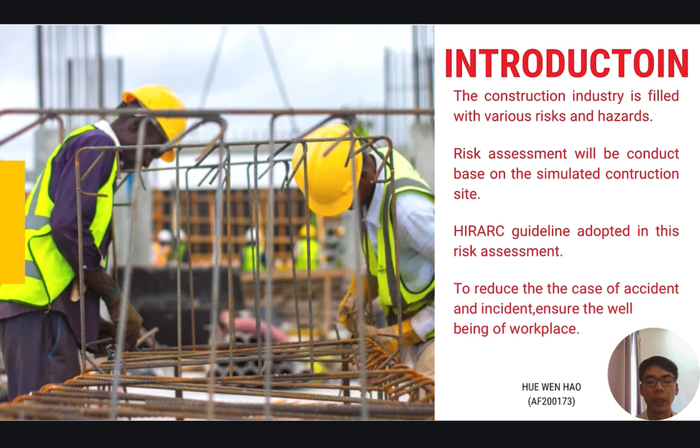Good day, doctor. My name is Chao On, matric number AF200166. I will talk about what construction site we chose and the overview of it. The construction site that we chose is Affin Bank and HSBC Bank, located at TRX Kuala Lumpur. This construction project is led by PERI Formwork Malaysia Sendirian Berhad.

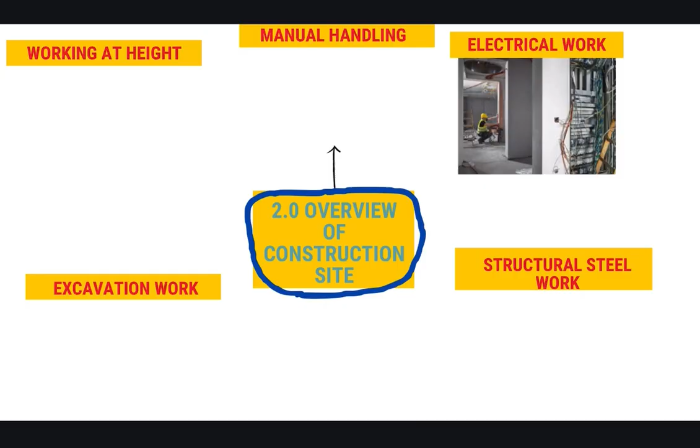Next, what are the types of work included in this construction site? First is working at height. Next is manual handling, electrical work, excavation work, and the last is structural work, steel work.

The meaning of working at height is a task conducted in a place where a person might fall a significant distance and sustain physical injury or even fatal injury. For example, building maintenance, installation or repair of structure, painting, window cleaning, electrical work, scaffolding, or roofing are examples of working at height.

For electrical work in the construction industry, it involves wiring installation, power distribution, fixture and appliance installation, and many more. This type of work needs an experienced electrician or electrical engineer to conduct it.

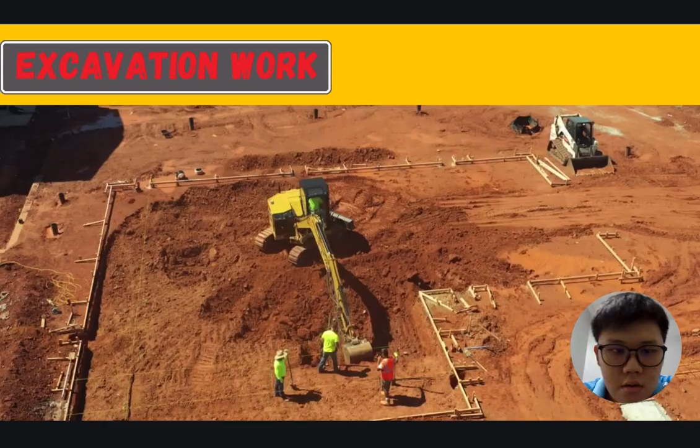The meaning of excavation work is using heavy machinery like excavators, bulldozers, cranes, or concrete mixers to do excavation of soil, rock, or other materials as part of a building or demolition task, using tools to open, face hollows, or even holes.

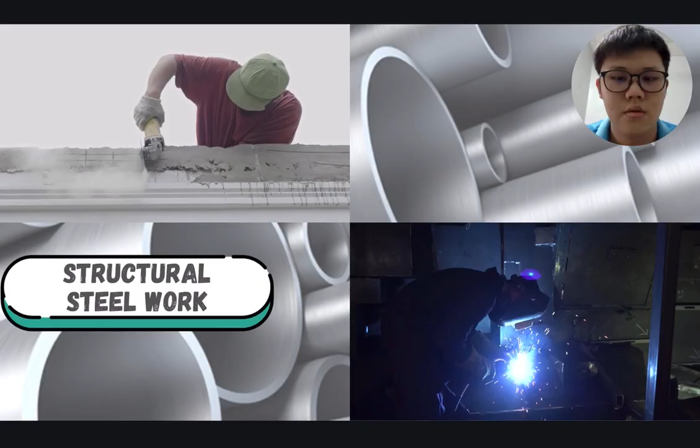For structural steelwork, the activities involved are welding, cutting, and grinding steel components. The purpose of this structural steelwork is to build the frame of the infrastructure.

Lastly, manual handling is involved in the work of this construction site also. Lifting, lowering, carrying, pushing, tugging, and holding or even supporting items by hand are all examples of manual handling jobs. These duties are widespread in a variety of sectors and organizations. So this is all my part. Thank you.

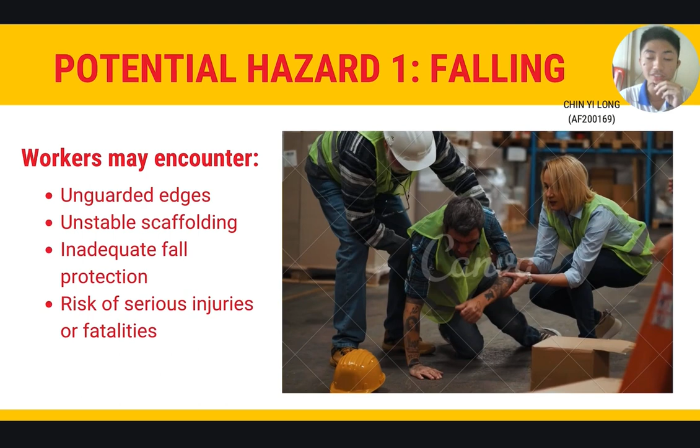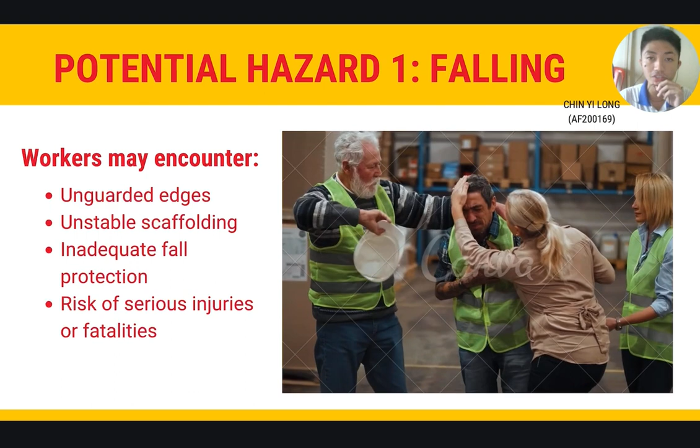Hi, my name is Chin Yi Long, matric number AF200169. Falling is a significant hazard in construction sites, as workers may encounter unguarded edges, unstable scaffolding, or inadequate fall protections, putting them at risk of serious injuries or even fatalities.

Electrical hazards present a significant risk in construction sites, as exposed wiring, damaged cords, and improper grounding equipment can lead to electrocution.

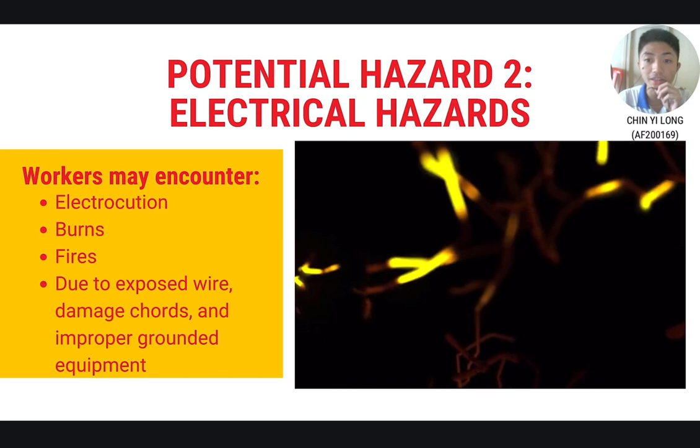Noise exposure is a significant hazard in construction sites, where constant use of heavy machinery, power tools, and equipment generates high levels of noise, potentially leading to hearing loss and other auditory health issues among workers.

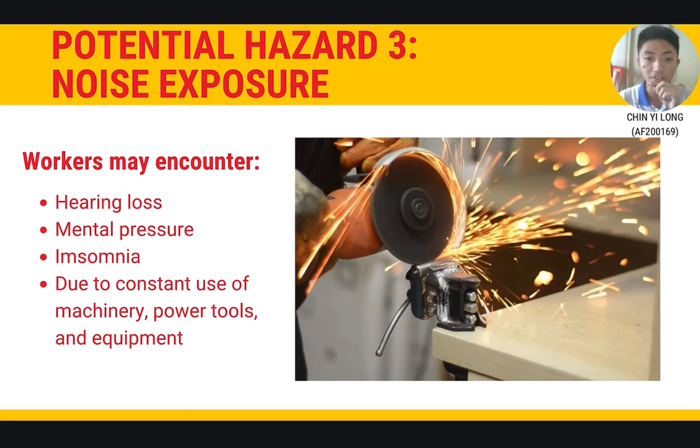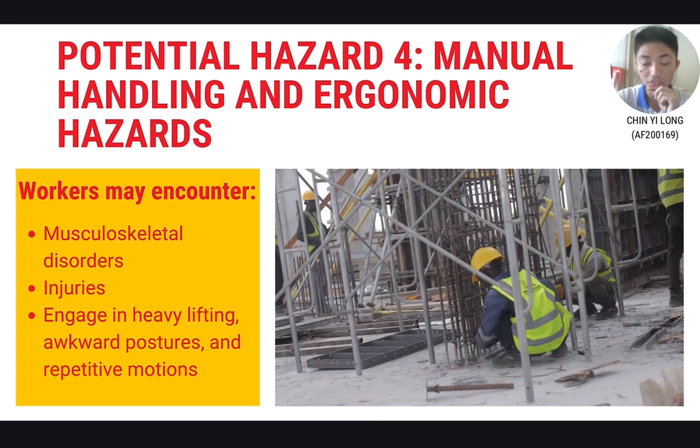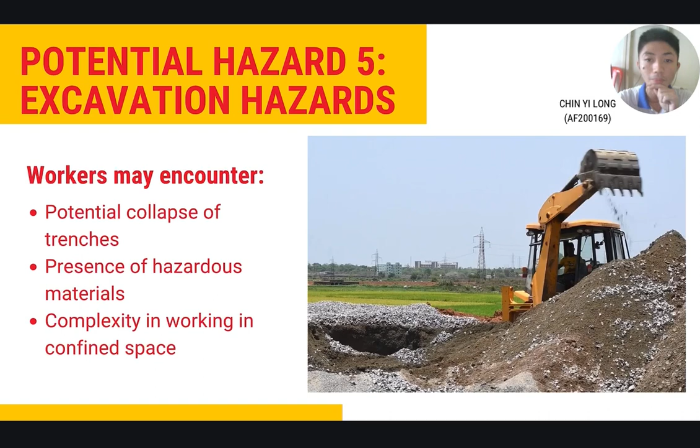Good day, Doctor. My name is Kang Jun Chen. Now continuing with the analysis of identifying hazards using HIRARC. Risk can be represented as a combination of the likelihood of an occurrence of the hazard event within a specific time or situation, and the severity, which can cause injury and damage to the health of people, property, environment, and any combination of these.

Three content needs in the HIRARC are hazard identification, risk analysis, and risk control. The more important part is risk analysis because we need to determine the risk from 1 to 5. Risk is the combination of likelihood and severity.

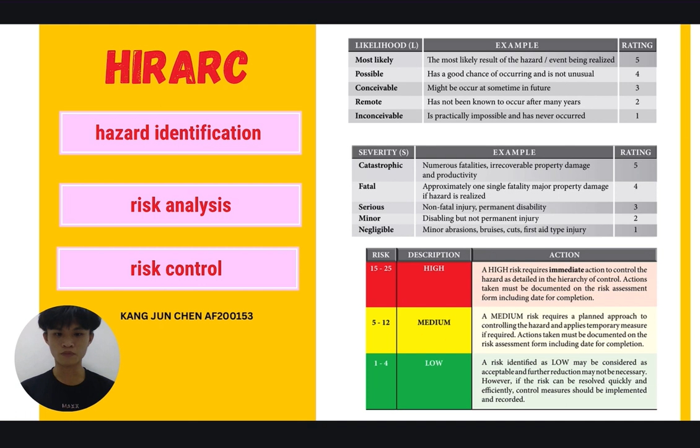The ranking of likelihood and severity we can take from the right-hand side figure. If the risk is high, we need to immediately control the hazard. If medium, we only need a temporary measure. If low, it means the hazard is acceptable.

Next, the HIRARC form below shows the hazards we found in the construction site. For the wiring installation, we show high risk, which is 16, meaning it will likely happen in the construction site and may cause somebody to die, be injured, or cause property damage.

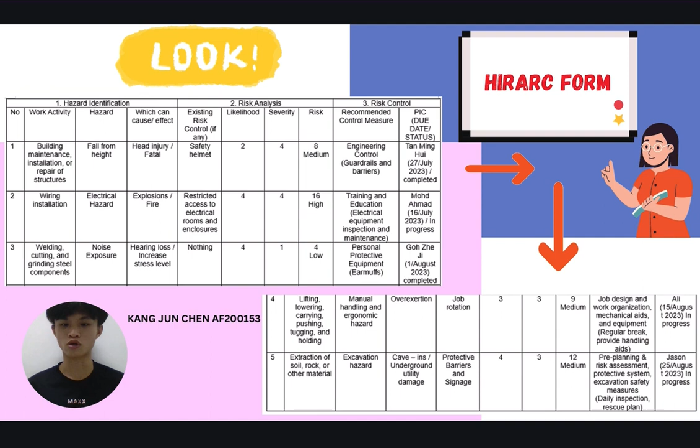So the control recommended is training and education, while welding, cutting, and grinding steel components show low risk, meaning it likely happens in the construction site but never causes somebody injured or damaged. The recommended control is personal protective equipment.

There are actually five control measures that we propose. The first one is training and education, the second is PPE, personal protective equipment, the third is engineering control, the fourth is job design and work organizations in terms of mechanical aids and equipment. The fifth and last one is pre-planning and risk assessment, for example building barriers.

I will explain more later on.

The first control measure I would like to share is to provide workers training and education related to their work, especially in terms of work knowledge and some precautions.

A program for comprehensive training can be implemented and conducted for all workers, including subcontractors, supervisors, and new hires, as it addresses a range of safety and hazard identification issues which might differ in different construction sites.

This program is able to bring out the outcome of increasing hazard recognition among workers, and encouraging workers to be familiar with safe work practices and emergency procedures for certain cases that unpredictably happen at site.

The next control measure I would like to share is safe equipment for workers, such as PPE, personal protective equipment. These equipments can ensure workers on their job are outfitted with proper PPE, such as safety goggles, steel toe boots, gloves, and hard helmets.

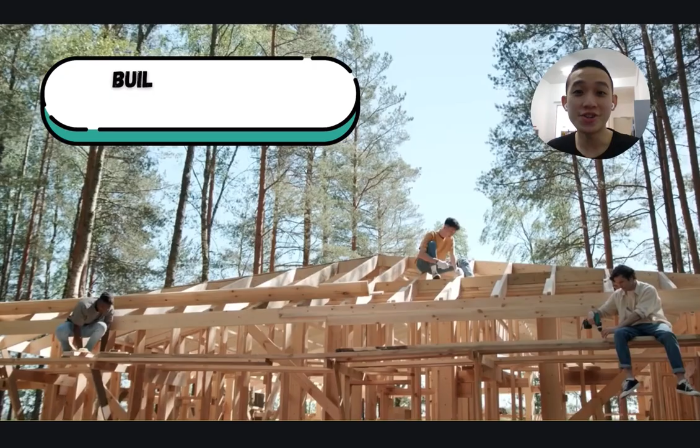The next one is engineering controls, which is really efficient in preventing hazards, for example falling hazards. Engineering controls such as building temporary guardrails or barriers on a high platform can prevent workers falling from height accidentally as they are doing their roofing constructions.

The fourth control measure I would like to share is job design and work organizations, which is really critical in controlling manual handling and ergonomic hazards. Not only do we train workers on manual handling techniques, but we should also make good use of mechanical aids and equipment to deal with heavy loads at site.

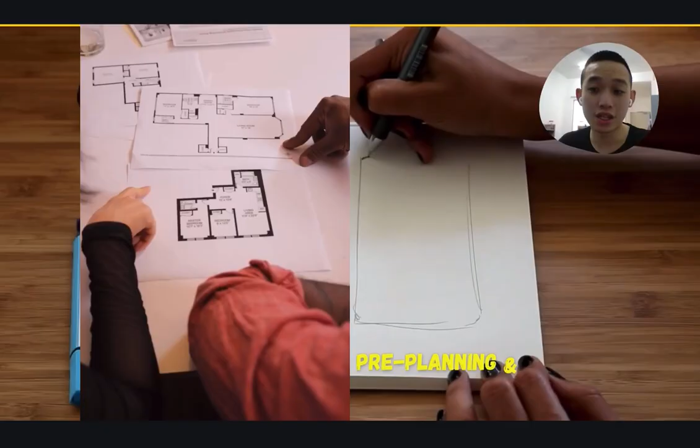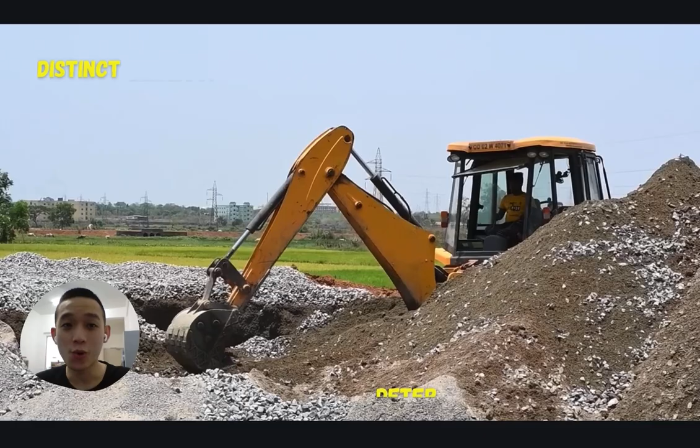The last control measure I would like to share is pre-planning and risk assessment, required to be done at the early stage. For example, at an excavation site, we should implement suitable protective systems like building a distinct physical barrier or signage or even fencing to deter unauthorized entries.

In conclusion, the risk assessment has been successfully carried out to provide the valuable reference, and insight to the potential hazards. Our group also provided a reasonable measurement control plan, including engineering control and administrative control. The most important thing is purposeful implementation and review of the ongoing construction site to ensure the effectiveness of the plan is required.